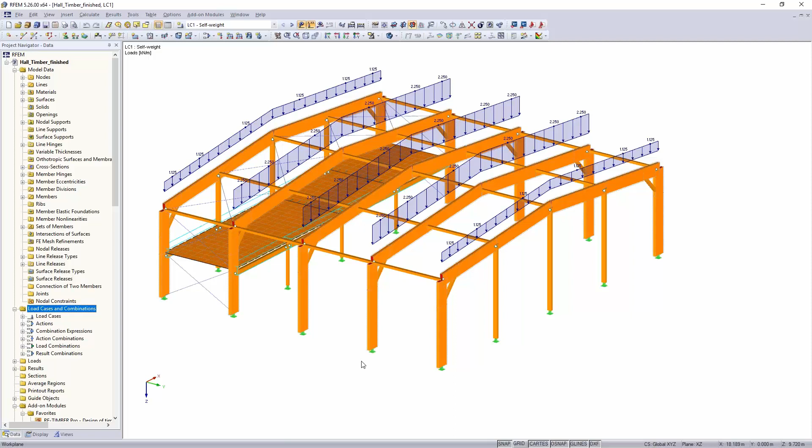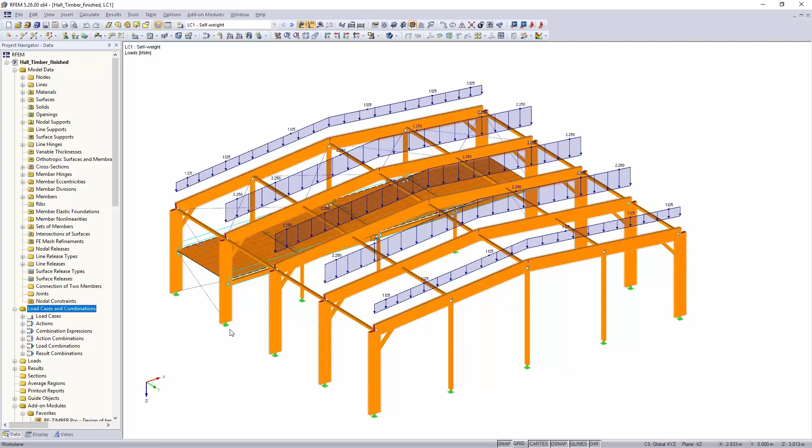Another question last week was what you can do in case you have a rafter and the roof overhang is a cantilever, and how you could regard that, as Andreas modeled the creeping for serviceability limit state with a creeping factor for moisture class 1. In such a case, you would have a rafter with moisture class 2 on the outside and moisture class 1 on the inside. I want to give you a short example what you could do in such a case.

On this truss, I will not add a cantilever here, but I will show you what you can do in a highly nonlinear system. Therefore, I will just focus on the beam or the truss in the middle, and I will take a look at the serviceability limit state in combination 117. You see, in order to regard the creeping, the software increased the load by a factor of 1.6. Andreas mentioned that last week.

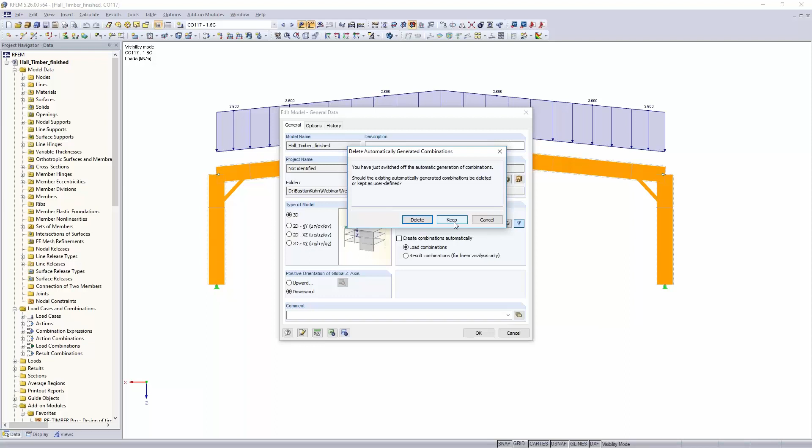And now, how could you do that in case this was a highly nonlinear system? Because then increasing the load will not regard creeping correctly. That would work via copying this and reducing the stiffness. That's just one way how you could do it. Therefore, in general data, I will now switch off the automatic load combination, and I want to keep the current load combinations, say OK, and now I can go in here, load combination 117. Copy this load combination, and I will call it non-linear.

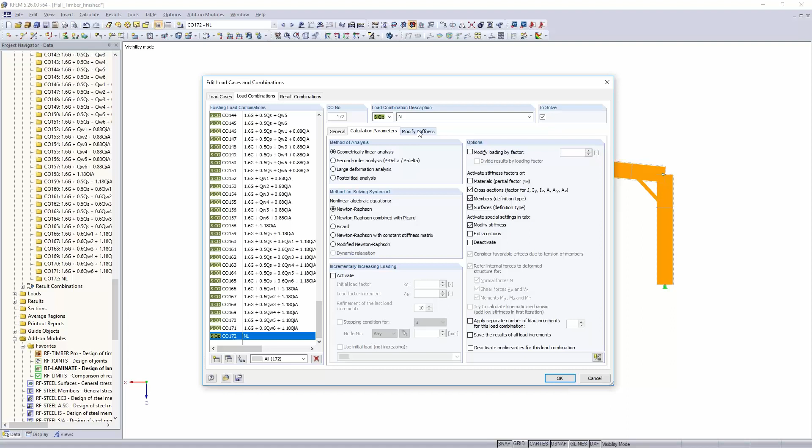Here I have this copied one. Go edit there, and at first I have to reduce the increasing, so just have it at a characteristic level, and then in calculation parameters, and we're going to need these options later on also for ultimate limit state, there's a check modify stiffness, and if you activate that, you can reduce or increase stiffness of hinges, materials, supports, nearly everything that you have in the structure.

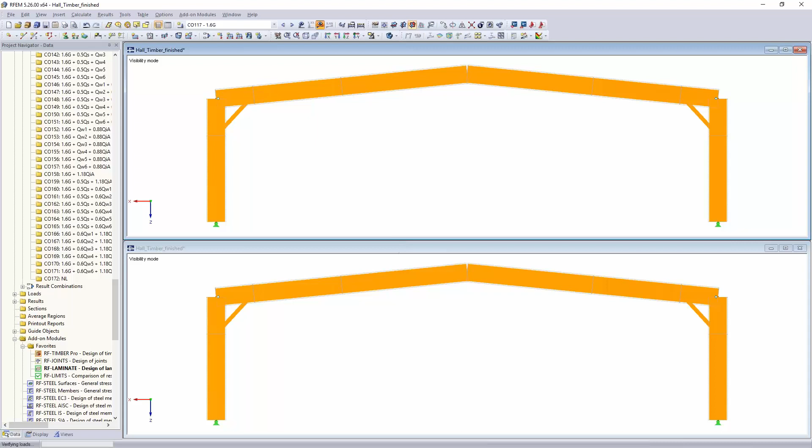For our endeavor here, we will now reduce every stiffness with the inverse value of 1.6, so that's 0.625. Press OK, and now when we look at the load combination, we want to see both. So at load combination 117, you see that you have a deformation there of about 40.7 millimeters with the increased load, so with a factor of 1.6.

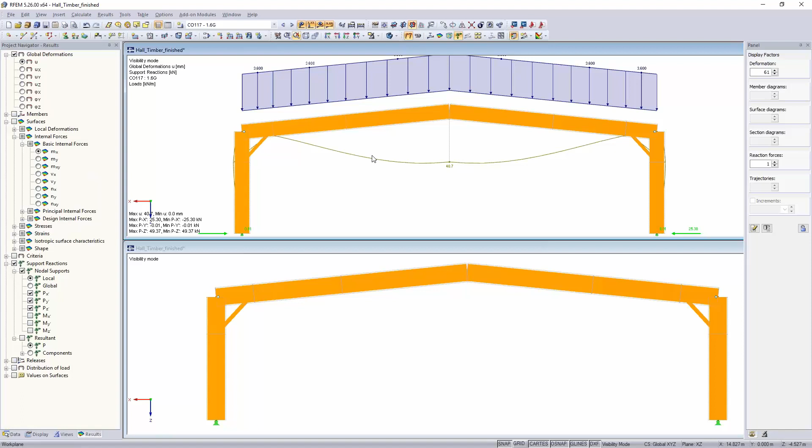Okay. So with this increased load, and here, oops, that was too far away. And here in this nonlinear combination, we have the original characteristic value. And if we look for the deformation there, as this is now a linear system, you can really compare that very easily. And you see you have there the same deformation just because we reduce the stiffness.

So this is a way how you could do that, in my opinion, pretty easy, also in case you have cantilevers outside, because then the timber material on the outside you could reduce with the factor of 1.8, which is for service class 2, and then on the inside you use the 1.6. So it's just one way how you could do it. There are more options to do it, but this is a way how I would recommend to do that.

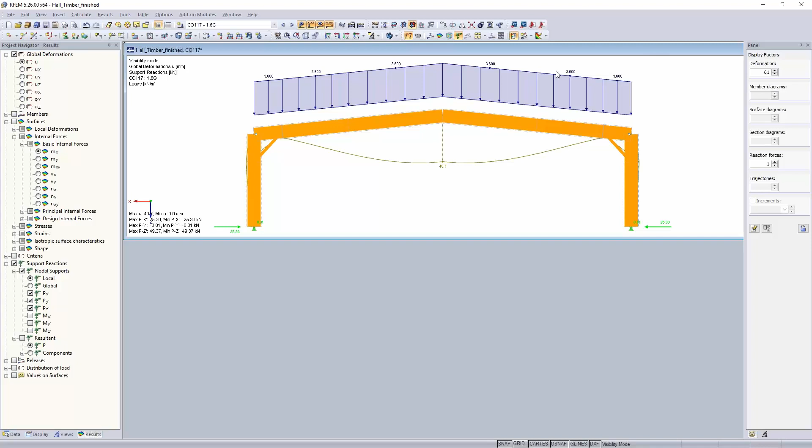All right. Yeah, this was just due to the questions that we had last week, and as they were coming pretty often, I think it is worth showing that to everyone.

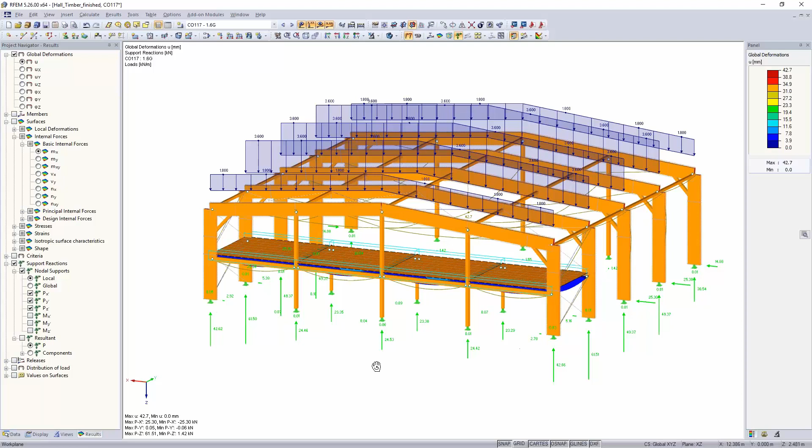Now we go into designing. Andreas already modeled here a CLT plate just for generating the stiffness that we would need for the design later on. But what he did not do, and it makes absolute sense not to do it when you model the structure, was to also generate the stiffness for the line hinges and the releases.

So he just generally introduced this stiffness here, but for the ultimate limit state you have to reduce the slip modulus by a factor of 2 divided by 3. For everybody who wants to know where it is written, it's in equation 2.1 in Eurocode 5, and you can do it similar to what I did before with the serviceability limit state.

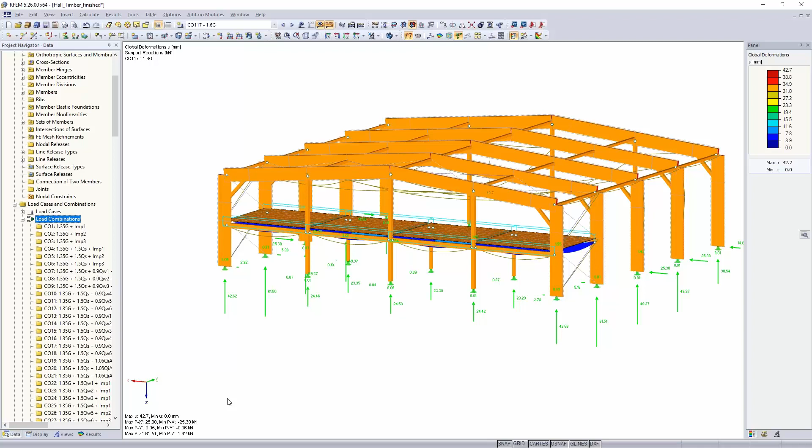Just go into edit load combinations here, all right, and then you just check the ultimate limit state, every combination of the ultimate limit state, calculation parameters, and again switch on modify stiffness, and in modify stiffness you say the line hinge and the line release we now also reduce by this factor according to equation 2.1 in Eurocode 5.

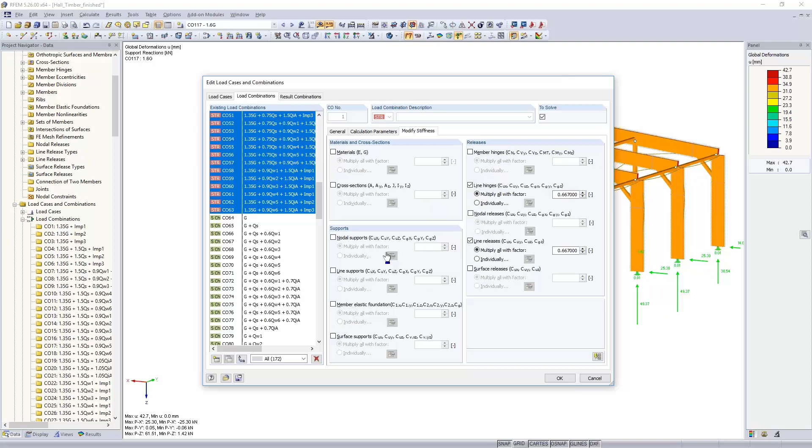Okay, so then this is done, and for SLS we are designing on characteristic level. Yes, that's what we want. Okay, so now you have also generated the stiffness differently for SLS and ULS design, and then you can now go to the add-on module Laminate, which Andreas already showed you last week. He used just the result combination here for the design.

Usually, for the ultimate limit state in Laminate, you should use load combinations because it's generating stiffness and it just makes more sense. But of course this will take a long time, and in any design add-on that I'm presenting here today, I already calculated the design-governing combination, and I will just use that in order to keep the calculation time less and not to spend hours watching the screen calculating. I think that's not so interesting for you.

You all surely know that we can generate combinations and also calculate them in not too long a time, but for the webinar we want to reduce it further. So okay, I found out that load combination 48 will be the relevant combination for me.

In serviceability limit state, I will do that actually similarly. For the characteristic combination, I calculated the combination 104. This one, I assigned it with characteristic. I will get to that point directly, what that means; I just want to introduce all the other combinations.

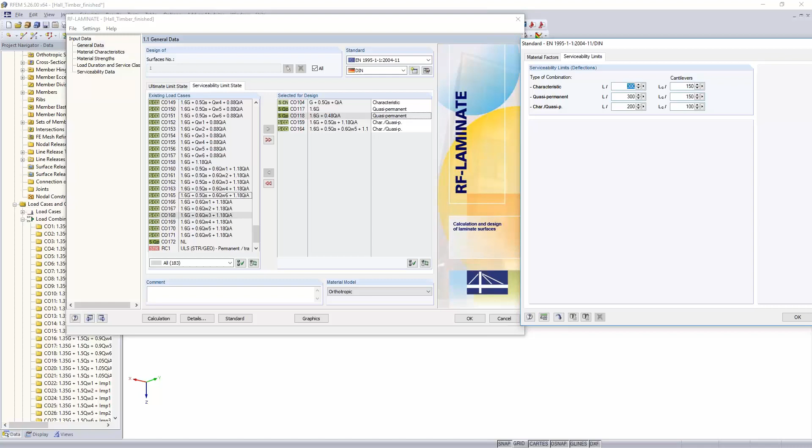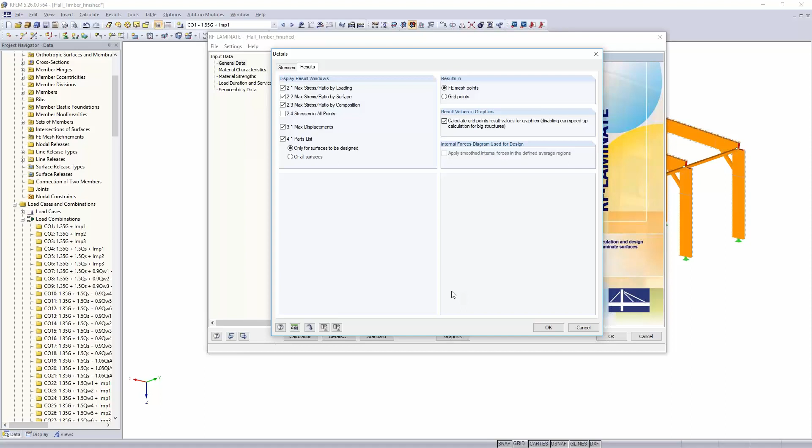I think the rest was well explained by Andreas already. Maybe we'll say a small word on the detail dialog. Here the stresses that are verified in this add-on are predefined according to the German annex of Eurocode 5. In case you have a wall that you want to design, there are more checks that you should activate, especially for wall loading behavior, but that's something more special. In the structure we are designing here today, we just have a plate or loaded plate in this case.

Okay, material characteristics. Andreas chose a plate from the producer KLH. Just to introduce all the other producers once again, we also have producers like Södra, Steiko, and so on. We try to keep the producer database up to date, but it makes sense to have a double check with the producer just in case they changed some of their setups or factors. But in general, we try to implement every producer according to the technical approval from the producer.

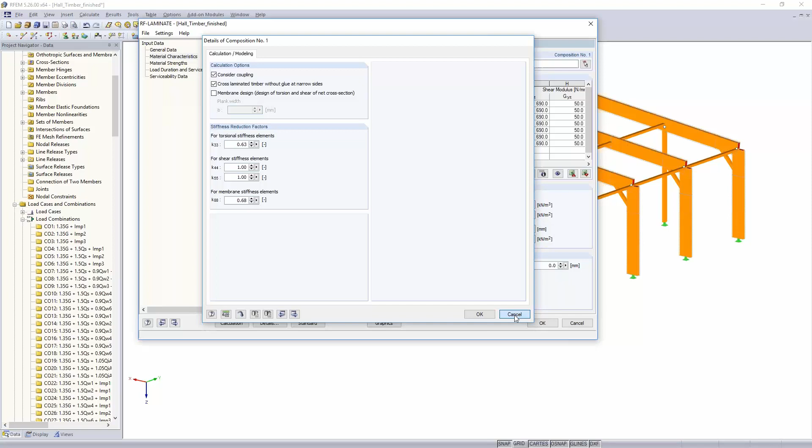Okay, so we choose the KLH. I'm not going to change that today. Here, editing the details was also shown. KLH uses timber without glue at the narrow sides, at least for the stiffness. That's what I said - in case you have a wall loading behavior, you should activate the membrane design here. All the factors are predefined according to technical approval, and this generates the stiffness here. The strength counts the same way as well.

And load duration and service class is also assigned. Once again, in case you have a rafter with a cantilever, for the strength you must choose a different service class. That can be done quite easily here. We are completely in service class 1, but for the strength you could choose different surfaces with different moisture classes. That's no problem.

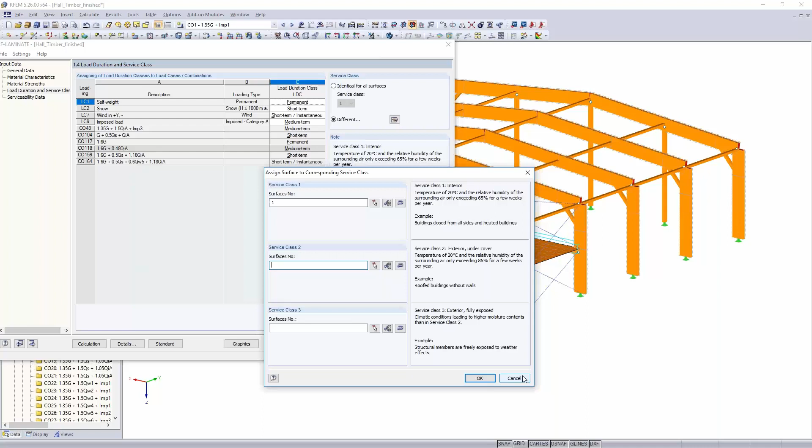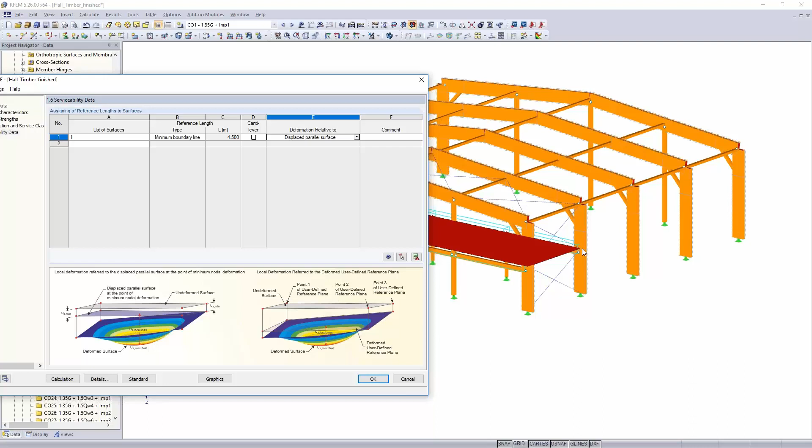All right, and then serviceability limit data. We just have this one surface here, and we want to verify it to the shorter length, which is from this point to this point, 4 meters 50 centimeters, and we assign it to a displaced parallel surface. I hope these pictures describe it quite well. Undeformed is just an undeformed system, and displaced parallel surface means the whole structure can deform, and we only verify the deformation from one node to the other.

All right, then we calculate it. And that gives me the chance to look if there were any problems. Oh, some audio was gone, but it was just from one person, so I hope that is okay.

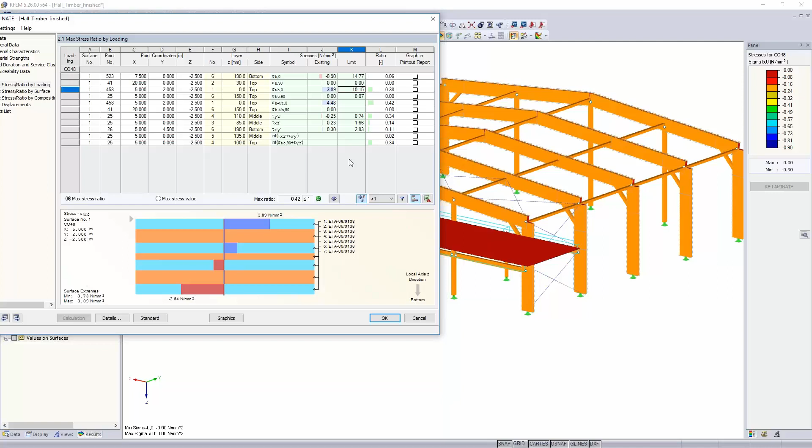Okay, so for the stress design, we now have a ratio of 42% loading, and it is tension compression, which in this case comes also from bending and tension compression on the outer sides. If you go to the graphics, maybe we can switch off the rendering, that helps. You see you have pretty high loading where the support in the middle is, and there are probably also shear problems on the edges of the surface, which also makes sense. So 42% is not loaded that much here, but you also have to take a look at the deformation of the structure, and this is verified here.

And so if you look here, you see that for deformation, the loading is even higher - we have a loading there of 75% in this case, in the characteristic situation. And you should also not forget, maybe you would need deflection analysis as well, just in case this is required.

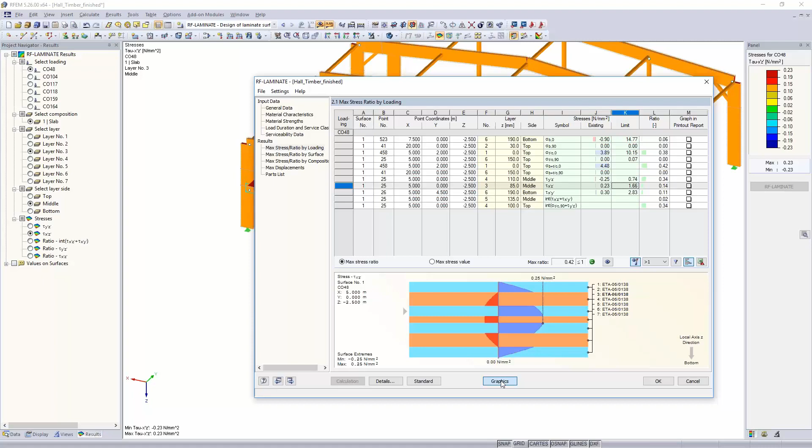Okay, so the design for the beam, or for the panel, is done here, and we could go to the design of the members. Maybe one thing I forgot - it sometimes makes sense to add one of these pictures, for example, to the printout report. You can do that here directly in this column. When we get a nice shear, this is probably something you would also want to add to the printout report, and maybe something outside the graphics too, like this one for example.

So the design of the plate is done with this, but the connection on the edges of the plate, and also on the outside of the plate, needs to be done, and therefore we will just grab combination 48 in ultimate limit state.

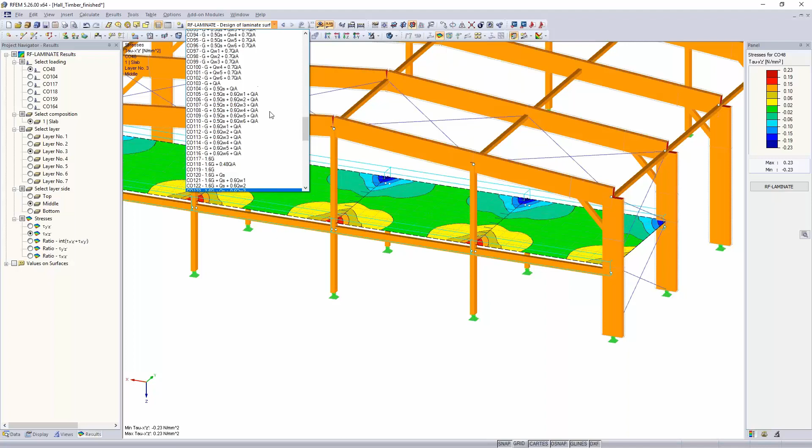There it is, 48. In the result, you have down below the option releases, and there you can see what normal force you have in the line hinge. That's not so interesting here, I think, but for the plate lying on top of the beam, it's probably relevant, because this is the shear that's in between the plate and the member, and that's what you really need to connect.

You see that there the value is not that low, and that's something you probably need to verify. So this gives you a good graphical overview. Via right-click, result diagram, you could also smooth around this area. It's not really a high peak, but you can say, okay, my connections go, for example, over 1 meter. If you start at 1 meter and end at 1 meter, and want a linear or constant value, you can smooth it a little bit, so you have a value of 10.8 instead of 15.35 kilonewton per meter.

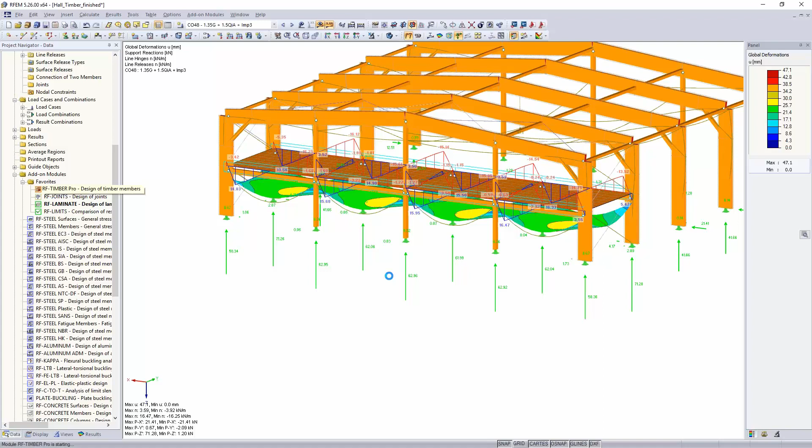So once you have done this all, the design of the plate with its connections is done. You could say check to this, and now we go to the members. Therefore we will start the add-on Timber Pro. And in here we have members and set of members.

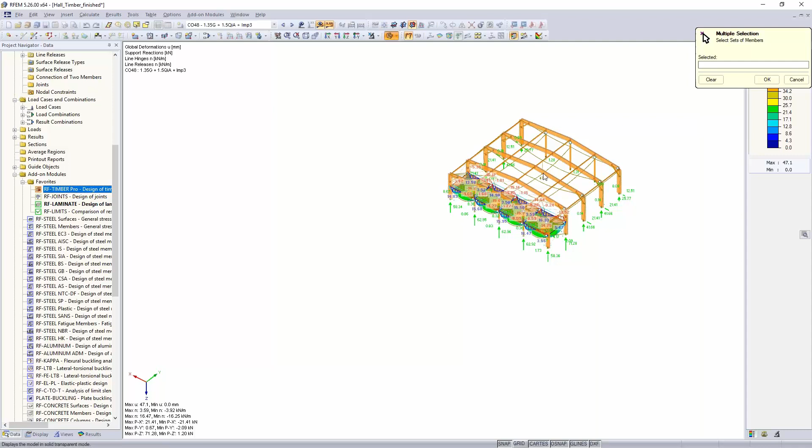Set of members in our constellation are important for the serviceability limit state. So for the deflection, I will only verify the set of members in the middle, so set of member 9 and set of member 6. The set of member is also important for stability, but in what we are doing here today, we are taking the deformation from the point where you see the mouse here and the mouse there, so we take the whole length and verify the deformation on this part.

Once again, also here I will not verify the complete result combination, as this would be too time consuming for the webinar, and I will use combination 38 and 44 just to have 2, and I will do the same for serviceability limit state with combination 72.

For the characteristic level, once again, for quasi-permanent characteristic, I can choose both, as there are only 2 generated, and for the characteristic quasi-permanent, this one now, I will use combination 164. Okay, once again, it's similar to what we have had in the laminate add-on.

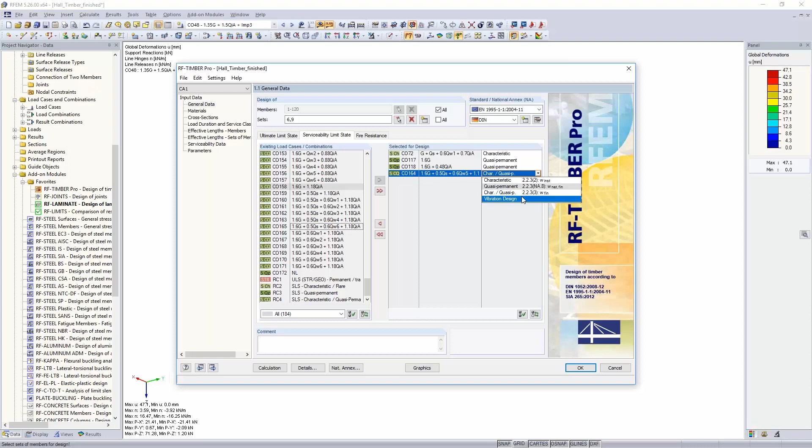It's automatically designed. If you want to do a simplified vibration design, you could do that here as well. But for the members, I don't see that too problematic here. Maybe for the CLT, as I said, that would be something I would maybe do or add, but we're not going to do that today.

Fire resistance is possible with Timber Pro. It is also possible with the laminate add-on, but it requires more effort. Maybe Gerhard or I will send you an FAQ where we answer that. So it's possible, but in laminate, as laminate generates stiffness, it is just more effort to do.

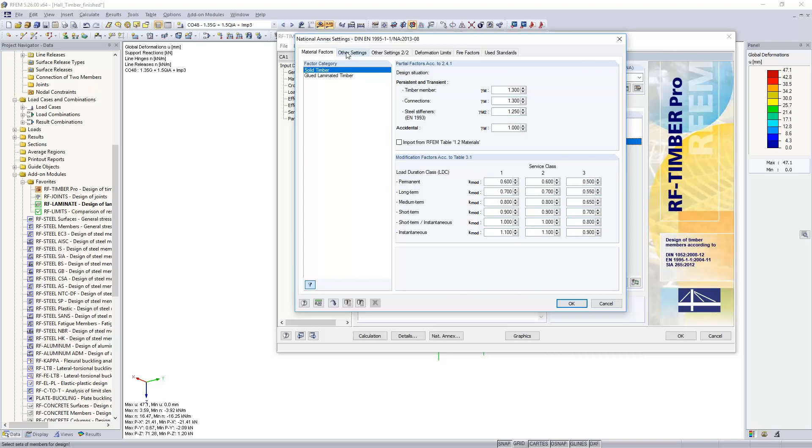Nevertheless, it makes sense to take a look at the detail dialog of the National Annex, because you not only can define deformation limits, but you can also add all the other factors, for example, for K-crack, for shear verification. If you, for example, want to calculate LVL from the producer Baubuche and so on, you could also activate that here in the detail dialog.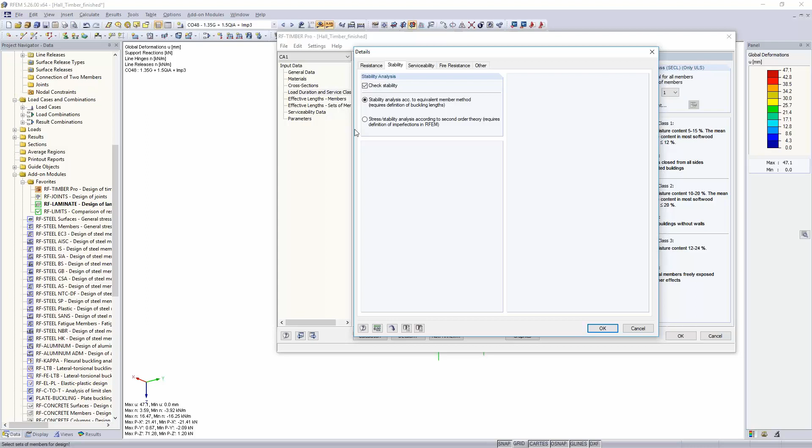The rest is not so important. Load duration service class is also the same dialog as what we have had in the laminate add-on. One thing I forgot when we started, in this case we defined imperfections and calculated the ultimate limit state according to second order theory. Therefore buckling does not need to be verified, and for lateral torsional buckling, I have a pretty stiff sheeting and will verify that separately, so I can switch off the whole check for stability.

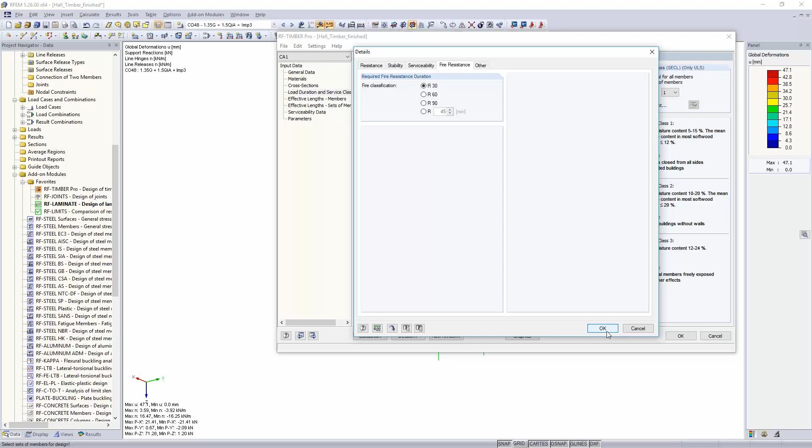Serviceability, that's the same as what we have had in laminate, with deformed and undeformed system. Fire resistance we do not do here. Serviceability data, okay, we say set of members. I remembered what we did there: member 6 and member 9, the ones in the middle, and I'm using the full length.

And maybe also the members underneath the CLT should be verified for deformations. I will now only take the one here inside. Maybe I just don't care about the ones on the outside, and verify them. All right.

Parameters is shear force reduction and also cutouts, which we do not have in this situation, and so we could start the deformation. We could start the calculation of all the combinations that we assigned.

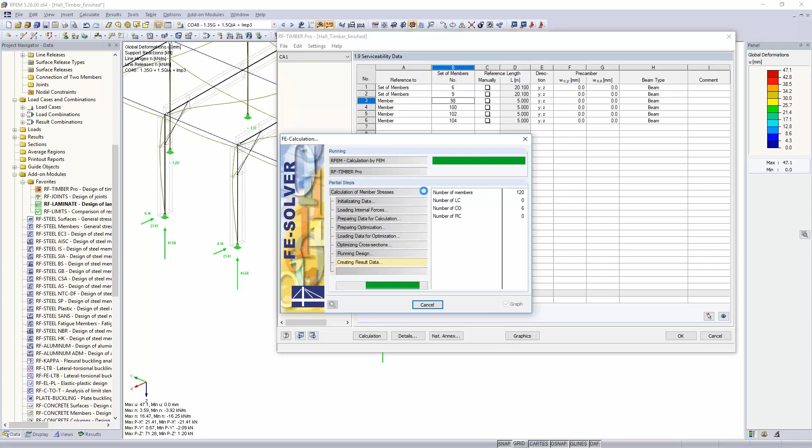There was a question for the fire resistance. Let me quickly introduce that a little bit more. I will not verify it today, but just to keep you informed: in order to verify fire resistance, you must create an extraordinary combination in load cases and combinations. Then what we do is reduce the section, all the sections inside here, with the so-called burning rate. According to this burning rate, we do all the verifications for the ultimate limit state again with the reduced section. So in general it's not so fancy to show, as it's actually the same as what we have here in ultimate limit state. Hope that explains it.

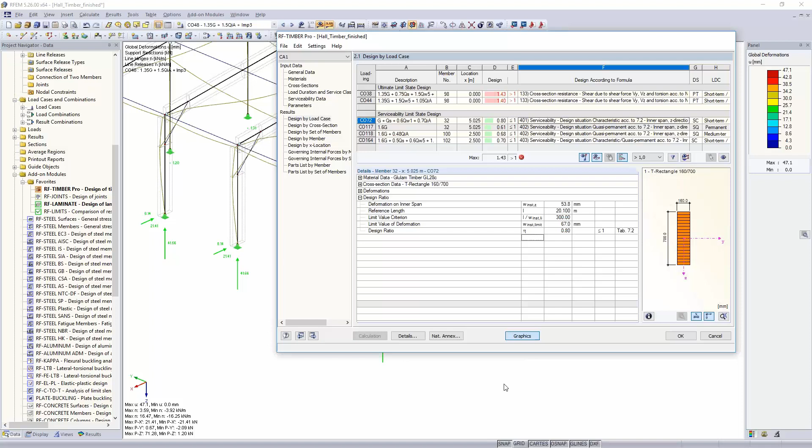If we go to graphics and look for it, you can see that it's just on the edges of this beam here. Maybe I will work with the reduced view. So you see that it's only here in these edges. And where does this come from?

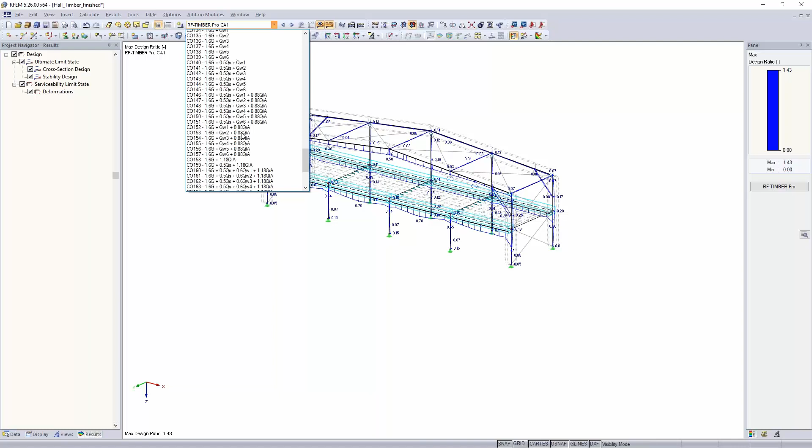Maybe we look for combination 38, where we have calculated that. Then the inner forces there and the torsional moment, which is the critical point here - in members, torsional moment - and maybe we switch off the releases. So you see that we have here a torsional moment of nearly 4 kilonewton meter there on the edges.

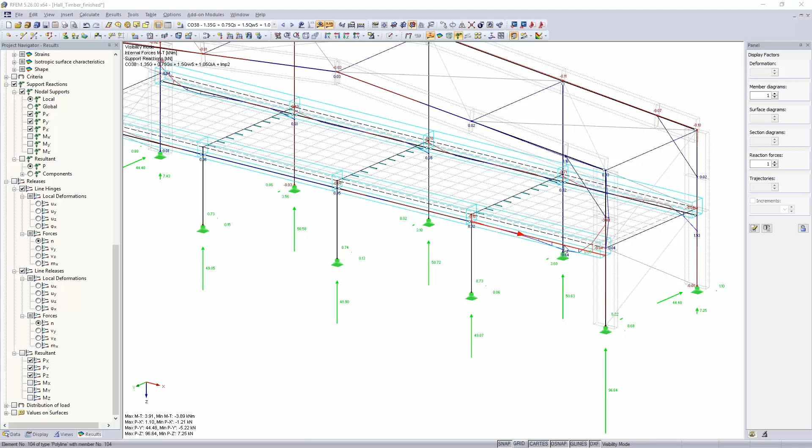And it's clear we forgot to put the degree of freedom here. It's only the degree of freedom for the moment in Y and Z direction, but not for torsion. So the phi x on these edges needs to also be given the degree of freedom of 0, which is always the case in timber design.

Yes, that requires that I delete the results. Because a moment of 4 kilonewton meter could never, or hardly ever, be transferred with any kind of connection type that we have there. And we will do actually the same here on the start.

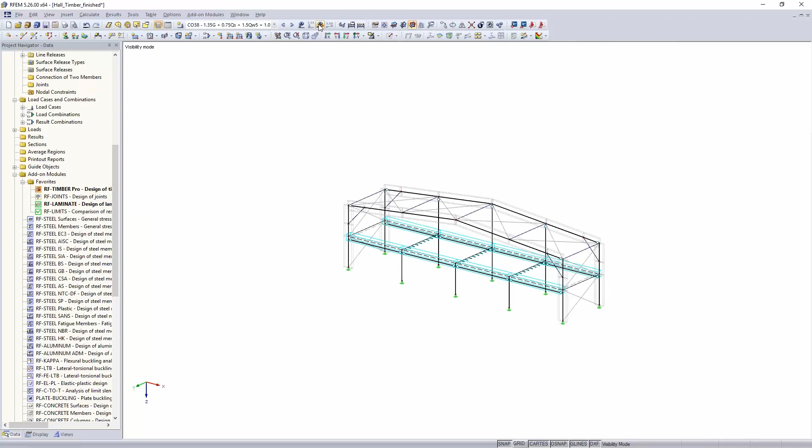So member start, this one as well, so the same hinge there. And now when we calculate combination 38 again, and just look for the torsional moments that we have now, you see that we really decreased the torsional moment by a high amount.

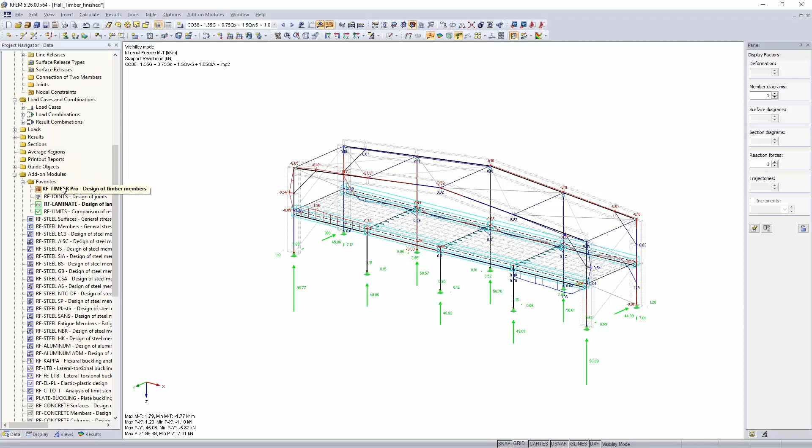And now when we go back to the design in the add-on, we keep the serviceability limit state. It makes maybe not so much sense here, as we saw that the serviceability limit state was not really a problem, but maybe we want to see the deformation in the longer set of member.

There I want to show you also the graphical presentation of that. So now you see we do not have any problem now from the ultimate limit state, and the design governing is now serviceability. All verifications are listed here, and you can recalculate everything that's done by the add-on.

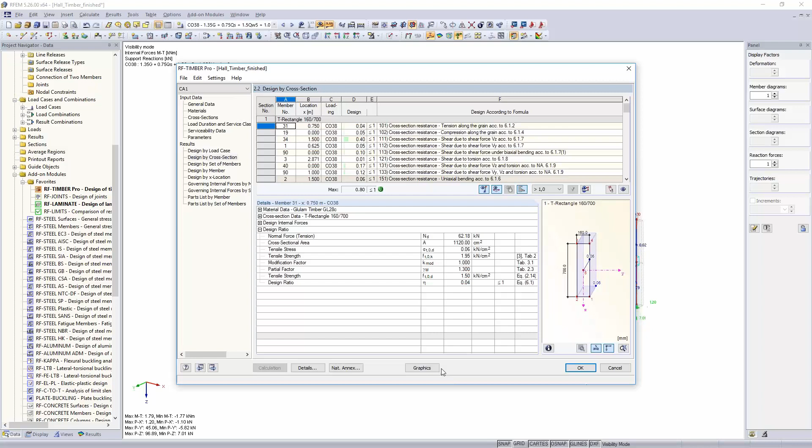If we switch to graphics and to the whole structure, we switch off ULS, and you see that the longer beam in the middle was actually what I expected - it's design governing with a loading of 80%.

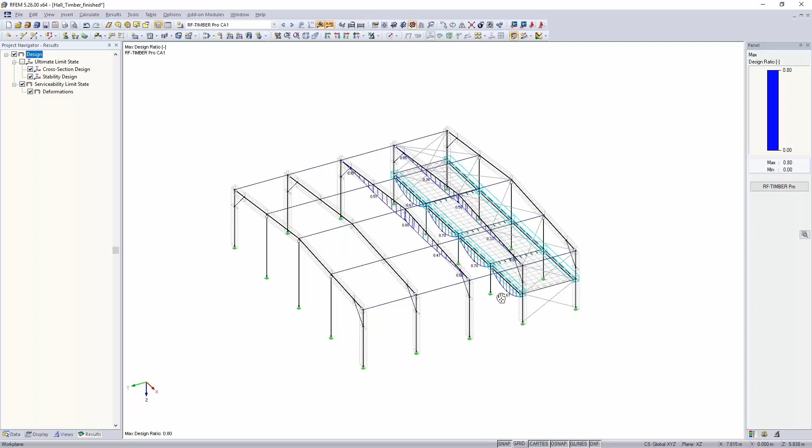And the smaller ones are also loaded pretty high, the beams that are underneath the CLT plate. That would be the design of the structure, and we can calculate now the connections.

I want to concentrate on the connections here at the outer edge of the hall, and also, if we have time left, the connections between the column here and the beam that's spanning from this point to this point. But at first I want to design the edges, therefore I will start the add-on RF Joints.

So that's a little bit different to what I showed you in the Timber Pro and in the Laminate add-on, because in this add-on here we have the possibility to design steel and timber. These are all different add-ons. So we are concentrating today on timber, and in this add-on you can still separate between steel to timber connection and timber to timber connection.

Steel to timber connection is every indirect connection where you have a steel plate sliced into your structure, and timber connection is a connection between main and secondary truss or load bearing. So we will concentrate for this corner here on steel to timber connection. You can calculate dowels, bolts, nails and screws. We will design dowels. You have the option to design different joint types. Our joint type will be without continuous member, because we will just have two members that are connected in here.

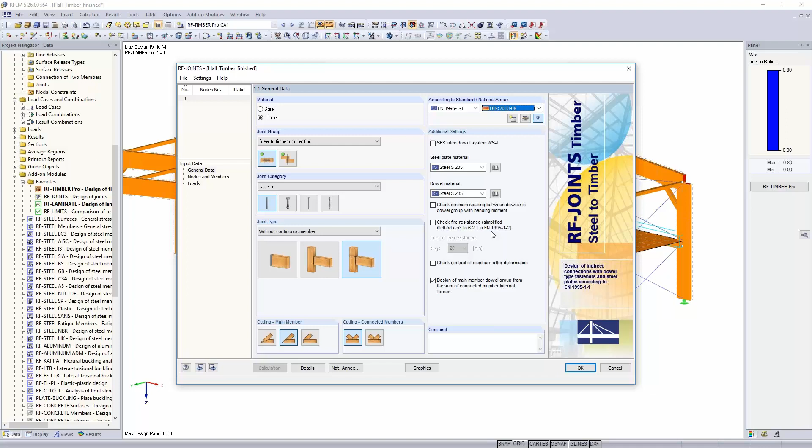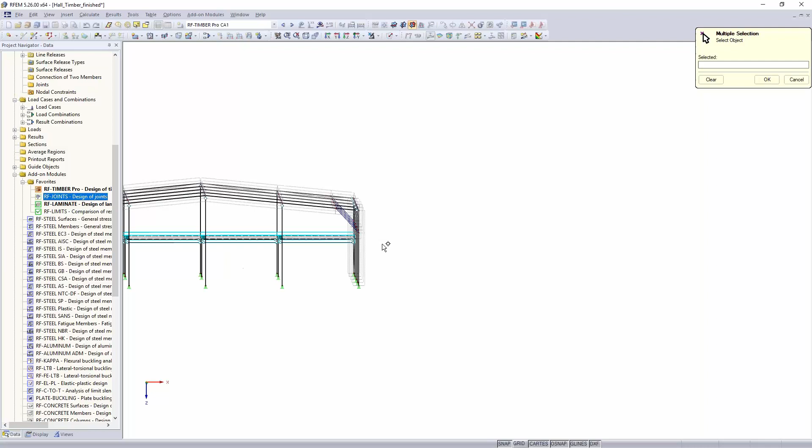But once again, it would require an extraordinary combination, which we did not do in this situation here. You can check the contact of the members and also calculate groups of dowels. All right, then we go into the structure, and let me switch off the rendering again and also the results. And so we will calculate all the corners here with one check, and also the ones from the other side.

All right, so now I get a lot of alerts in here, which is clear because we have invalid members, because steel rods cannot be designed with a steel plate, and also the secondary beams here do not make too much sense. So we will just keep the connected member and the main member, and all the other members we will set as inactive. So this one inactive and this one as well. And then it asks me, shall all the other connections work similar to this? Yes, that's what I want. And do you want to have default geometry? No, I do not want that. Okay, now all these nodes have the information that they should be connected in here.

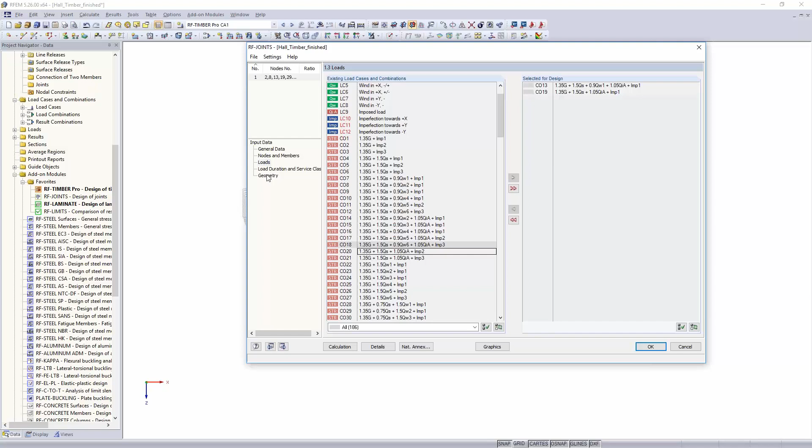Once again, I will just assign one ultimate limit state combination, so 13, or let's say 2, 13 and 19. Load duration and service class I will just skip. I don't think that's too important. And now we are in the dialog of the geometry, and that's now the important dialog. Here you can at first define the shape of the steel plate. User means that it's just assigning the steel plate on the outside edges of your structure. You could also have it rectangle, here you see. So then it will be a rectangle one, and it could also be convex. I think user for most constellations is the one that you would want to have.

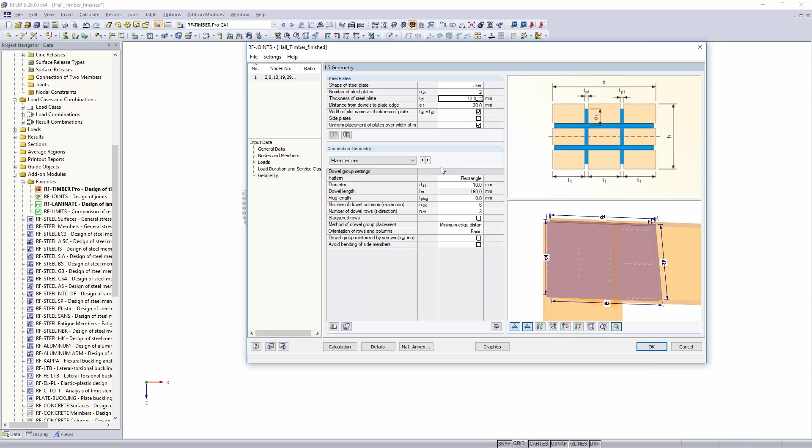You can define up to 5 slotted steel plates. For our first design approach, I will assign 2 steel plates. I will give it a thickness of 14 millimeter, and everything else I will leave as it is. We can also define side plates, but I don't want to do that for dowels. It's probably not so sensible. For nails and screws it makes maybe more sense. We can choose a pattern, rectangle or circle. And here we define the diameter of the dowels. I keep them similar as the plate with 14 millimeters.

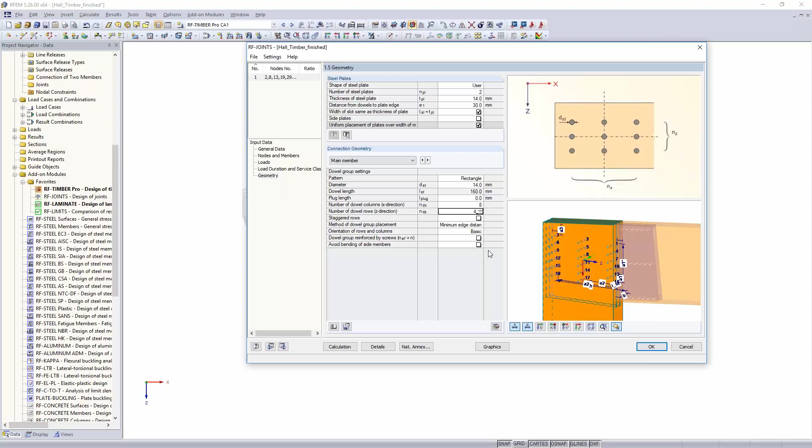And I say I want in X direction 8 dowels and in Z direction 4, and maybe also a more sensible limit distancing with user-defined limiting. So for the main member, I will choose an a1 of 100 millimeter and an a2 of 175 and, oops, that was too quick, a3t of 140. Okay, so that's that. I have to do the same for the connected member. So that's 14, so 8, 4. And also here I make a user-defined distancing with 105.

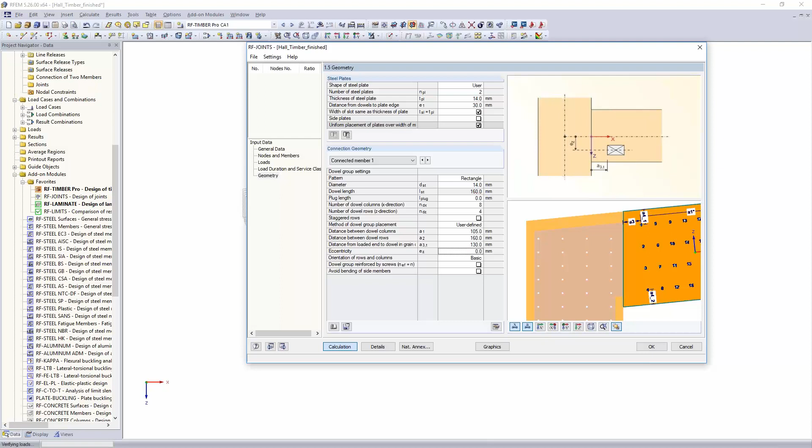I could save this group to a library and just get it back again. So that's also possible. I do not have to define that every time again and again. Now talking and inputting is too much. So a2 I define a distance of 160 and a3t a distance of 130. Yeah, this is this. I could also reinforce with screws, but I want to look if this is really necessary in here. And when I have bolts outside, I can avoid the bending of side members. So these are more options that I have. And now when I calculate it, what did I choose now? 19 and 13, sorry.

Right. So now we see here that it's overloaded by 5%, but we also see that the steel plate is loaded nearly nothing, 7% loaded. The dowels themselves are loaded by 42%, so that's also not that much.

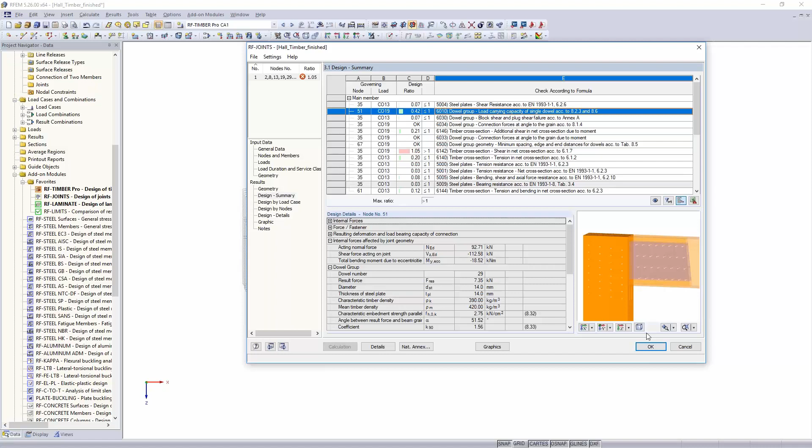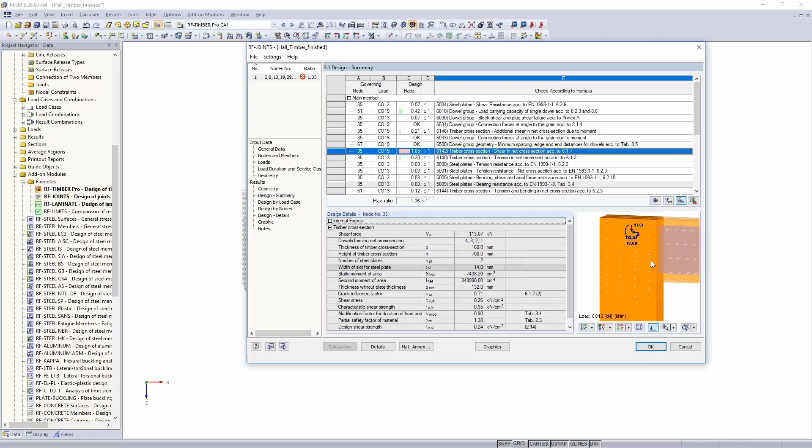But in the verification of the dowels, you can see that we are verifying the force in each dowel. So we really get the force and also the deformation that we have in each dowel in here. And you see that we have an overloading by shear of the timber. So the timber is overloaded. And now what can you do when you have an overloading of the timber? According to Eurocode, you should calculate with regard to slip in the connection.

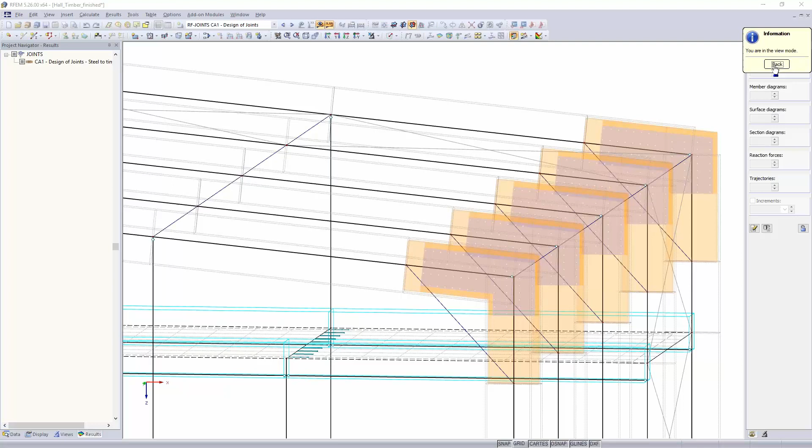Right now, when you look outside at the structure, wait, we can do that in here. There is still this connection assigned, okay. But it is still this moment hinge here with a value of 0, and this beam or member is connected to the corner point. But if you look at it in more detail, you would say that it's probably connected via all the dowels, and here is actually no connection. So the static system that we are designing in here is actually wrong.

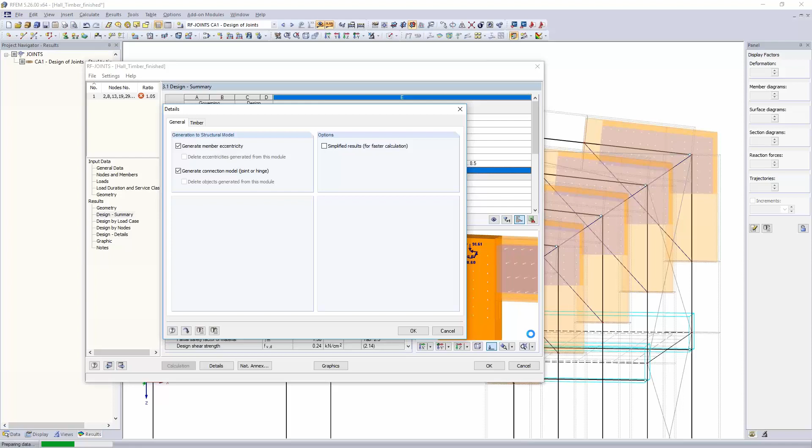And now this add-on gives you the possibility to generate the member eccentricity and also generate the connection model. If you activate that, it asks you that it will delete all the elements, and it will also create a new static system. So if you look at the back of the screen right now, you see that now that I pressed OK, it overrides every element that I have activated in here. Wait, I have to go outside, and maybe we will just look at the truss in the middle again, just like we did in the start.

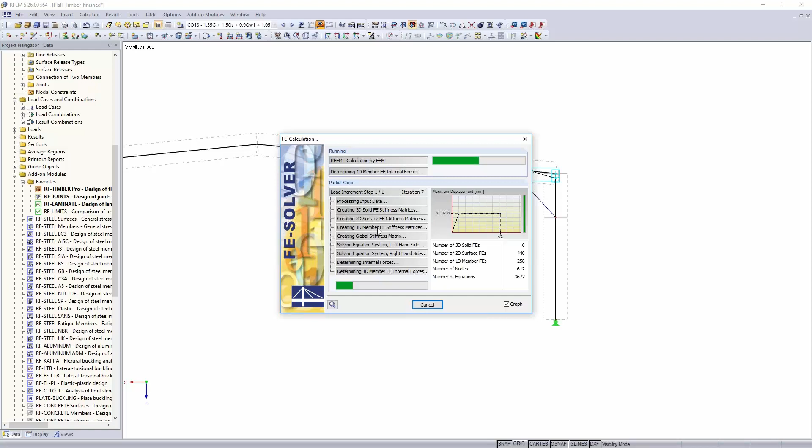So, if you look at combination 13, I think that was the design-governing one. 13, and let it calculate. In here, okay, the joint is not so relevant here, but when you look at the deformation, I think that's probably the most impressive thing to see. You see that there is no connection anymore, as the connection goes now from this point to this point. So that's the intelligence behind it, according to Eurocode 5.

So, with this information, we go back to the design tool. We saw that we had a pretty low loading of the steel plate. Usually when you calculate with the slip in this connection, you have a lower loading of the timber but a higher loading of the connections. That's what you really will find out. But the steel plate was only loaded 7%, so 2 plates probably make no sense in here. Therefore I changed that to 1 plate because I think it's still enough.

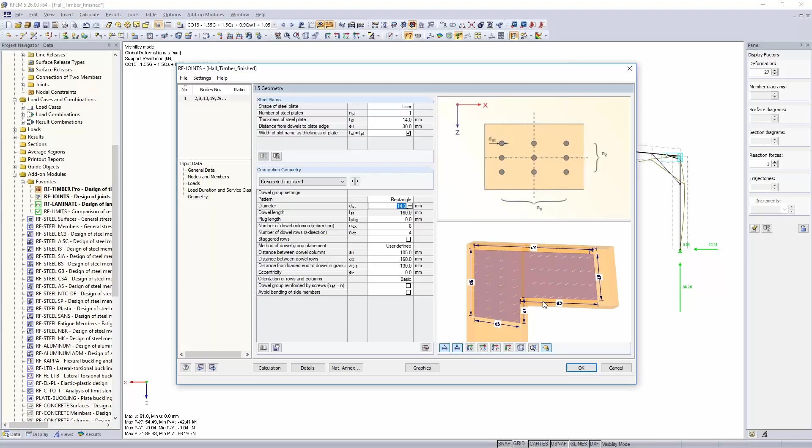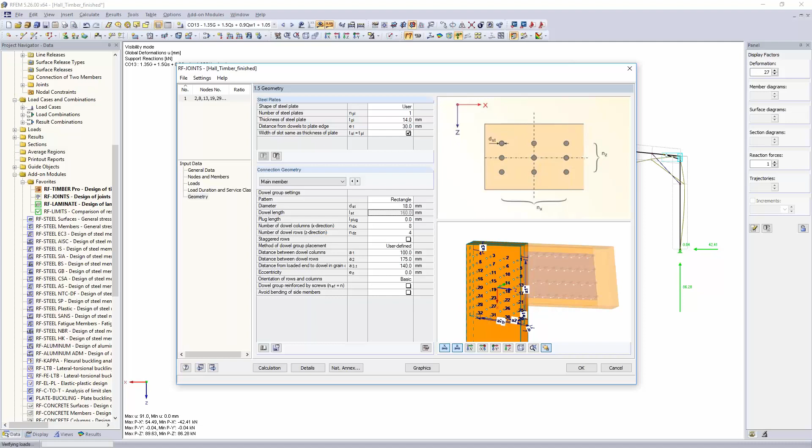But I probably have to increase the diameter of the dowels. So I keep that now with 18 millimeter, and I do the same for the main member just to have it similar. Everything else I leave as it was and calculate again. Now it asks me again, okay, that means I have to change the stiffness because I changed the diameter, and the stiffness exported right now was according to a diameter of 14 millimeter.

And calculate that again, and I cross my fingers that now the overloading of the timber is not a problem anymore, hopefully. But I expect problems in the connection design there. So, you see now we have an overloading of 12%. Damn, that's actually not what I wanted, but let's have a deeper look into it.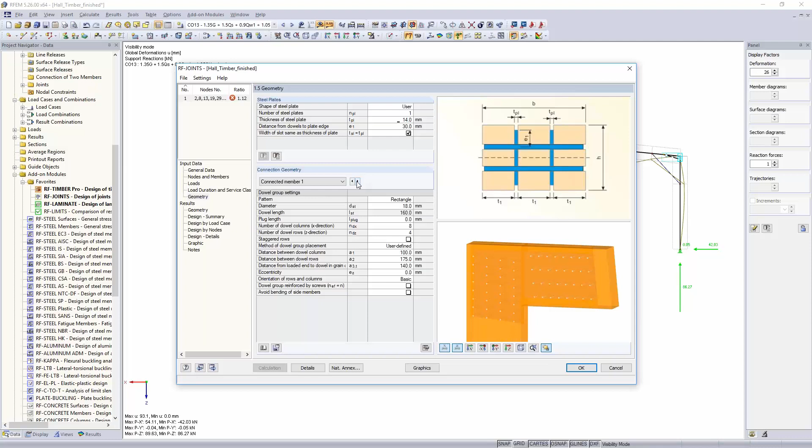So the dowels are now loaded nearly 50% more. Steel plates are also loaded pretty much more, but the timber is now not a problem anymore; here the connection is the problem. Okay, what else can you do if you do not want to change the geometry? The main member was actually okay. Maybe the connected member is something you could try to improve, and that's what I said when I started the add-on. You could reinforce it by screws, for example.

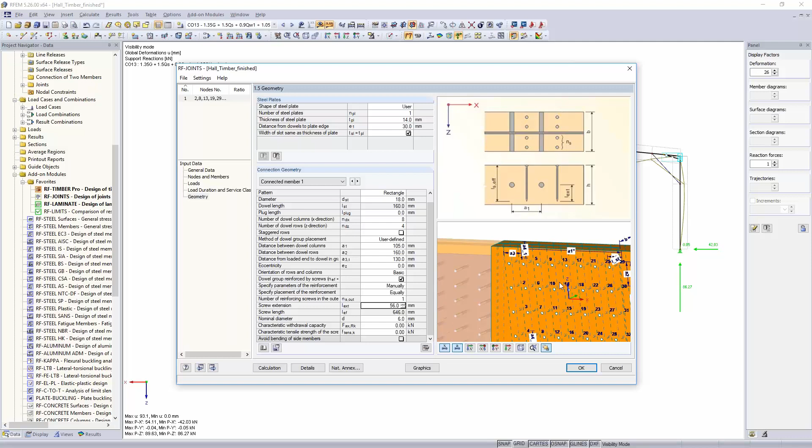So if you want to do that, maybe I define it manually. I don't want to increase the length of the screws to near the outside of the beam. I can just extend it by 10 millimeter, and if I'm choosing a screw from Würth according to their technical approval, I can assign a strength of 12.5 and maybe also say, okay, I avoid the bending of the members. That would actually require also some screws on the outside or a bolt, but just for giving it a try, and a bolt is also possible in here as well.

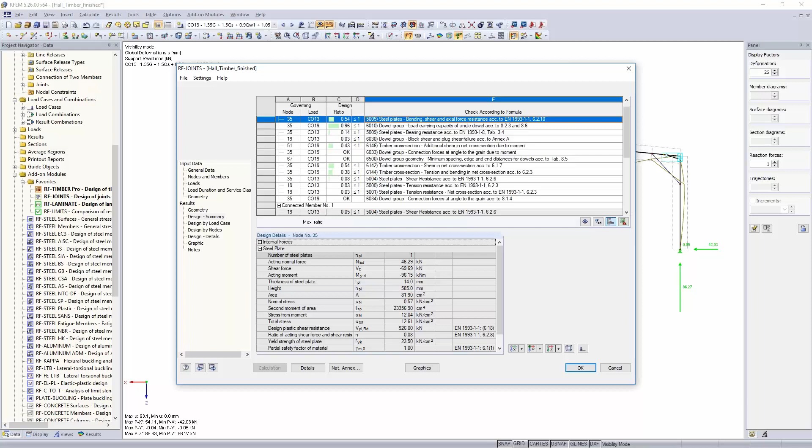So I saw there was a question about IFC and BIM, building information modeling. That's not part of the webinar today. Probably Andreas will make webinars with this pretty soon, or we already have webinars he can send you.

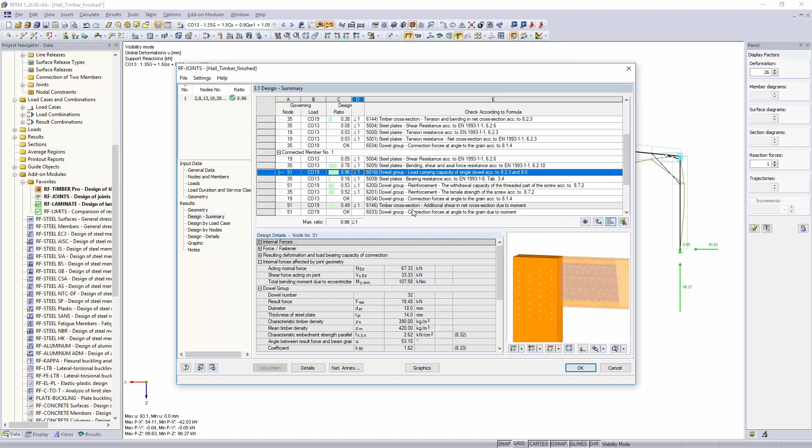Okay, got the result. We have now success. Everything's below 1. We have the green hook here. So, and we have now only 96% loading of the dowel group. That's what we want. Here in geometry, you can see actually the stiffness, similar to what I did with the connections in the laminate in the CLT plate. It does it differently for SLS and ULS situations. It's the same equation, 7.1, according to Eurocode 5, and exports that for every load combination differently.

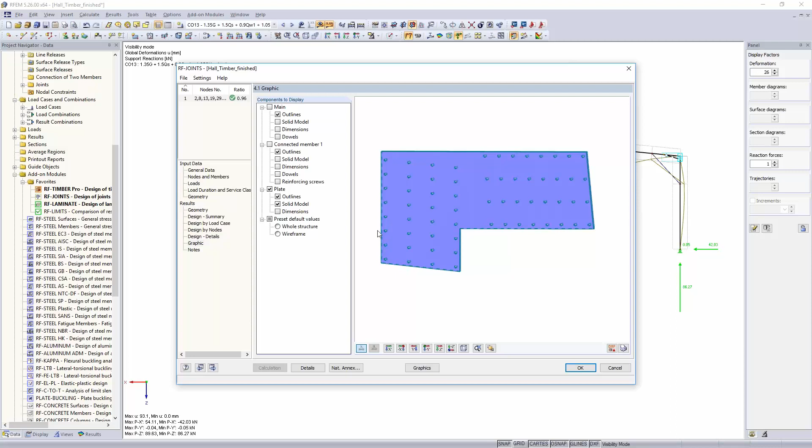You can also have a DXF or a plot you can export, maybe when you just want to export the plate to something. You can also export to your CNC and create a shop drawing of it as well. Okay, yes, we can check connections also for fire. I said it when I introduced it, but with a simplified approach.

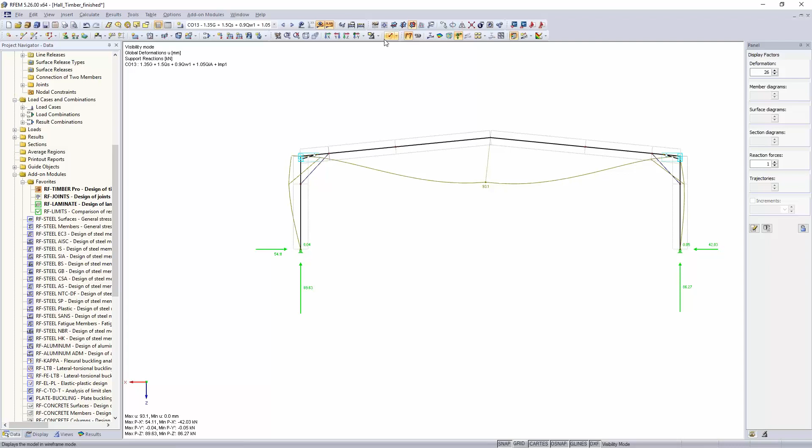Okay, we have a few minutes left, and I can actually take the chance to show you now maybe not the connection or the foundation design, as this was a question here, but to show you where you can do it, because I wanted to connect the beams here, where the CLT panel plates are supported on, to the column, and also the footings or the foundations of the columns. Just let me look what combinations I want to verify. It's the combination 13. This here is the same as what we had. I do not get into details of that anymore.

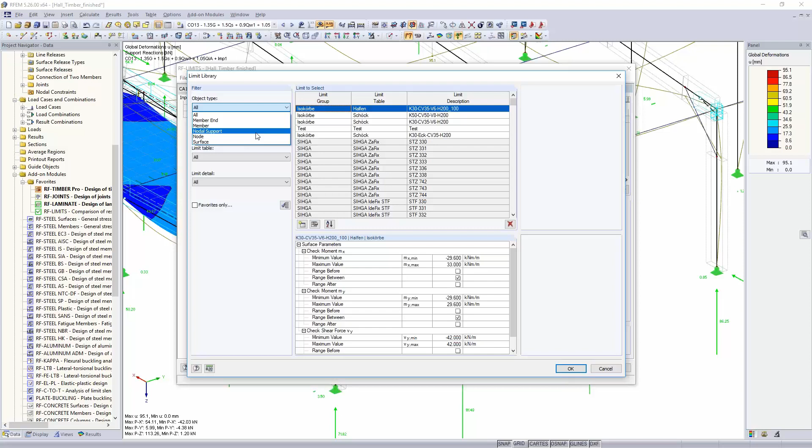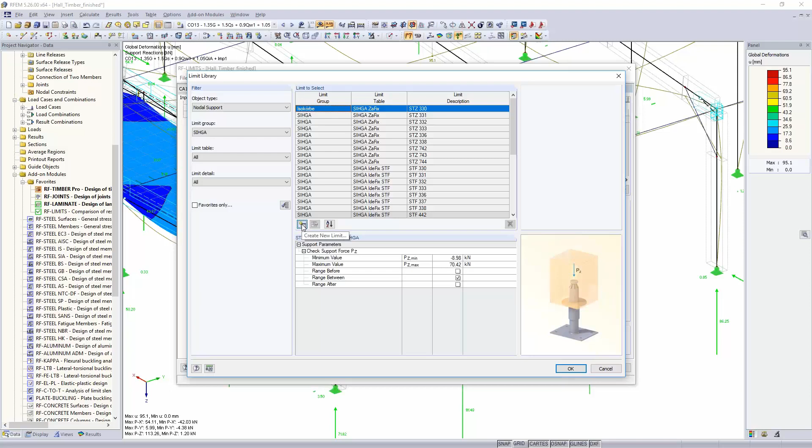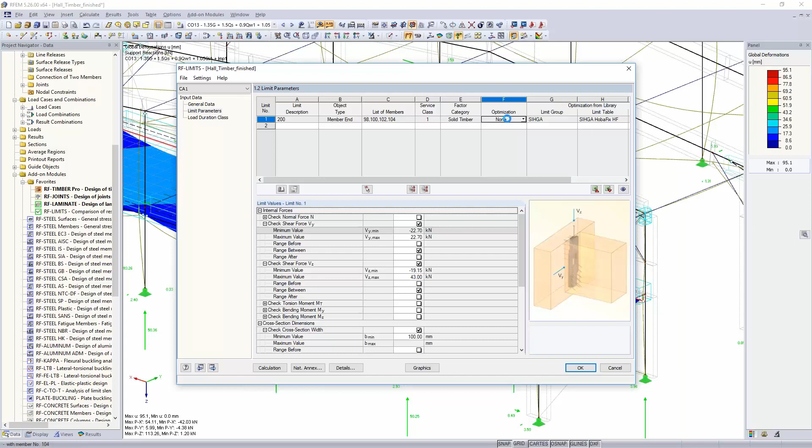Just whatever you want. And you can also verify the same point for member end with joist hangers and so on. We also have there several producers implemented, Würth, Simpson Strong-Tie, and so on. Actually, I want to choose the SIHGA connector today, but there are others as well. And you see we can check the section dimensions and also the load. Here we can define the list of members. I once again will just take the members that are on the inside of the structure, start and end member, say OK, and say OK, service class, and service class in this case is 1. Factor category, I can use solid timber. I can optimize this according to the row or the group and so on.

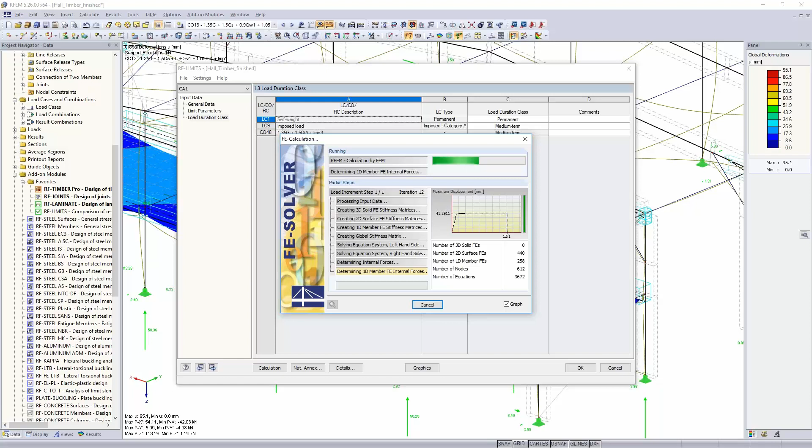Load duration class, probably there's not really much to say. We've had that all. Medium term is the one that's chosen here for the combination 48, and then verify this as well. All right. So, as I said, this is the database. It will check if the section is correct, or if it's possible to put this connection that we've chosen here on this section that we have, and also if all the minimum and maximum values are verified. So this is it, but it's probably quite handy to check a complete structure pretty quick. And you can, as I said, do the same for the foundations, but I'm not going to do that today.